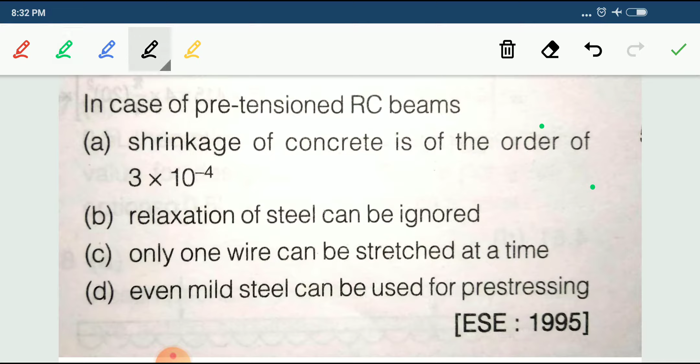Okay, the correct answer for this question is the shrinkage as per IS 1343. The shrinkage of concrete is 3 into 10 raised to minus 4. Due to shrinkage of concrete, pre-stressing members results in shortening of tensile wires that will contribute to the loss in pre-tension members. This is the answer for this one.

Okay, relaxation, this will not come. Only one wire can be stretched at a time - no. Even mild steel - no, we cannot use mild steel in pre-stressing. What is the reason for that? What is the strength of mild steel? That is only 250 Newton per mm square.

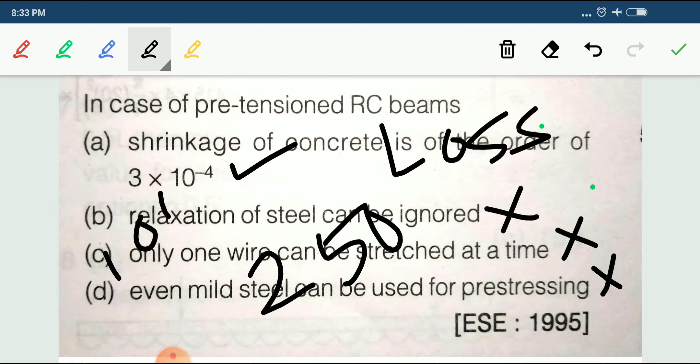Usually, if you go for the loss, what is the loss that is happening in the pre-stress? Nearly in the range of 100 to 250. This much of loss that will happen. That's why it is not advisable to use mild steel in pre-stress concrete. We are supposed to use high strength steel.

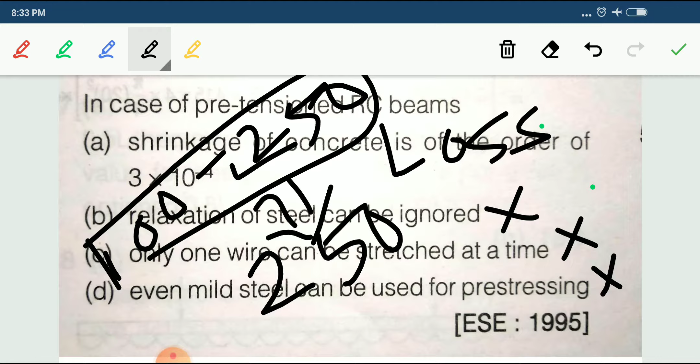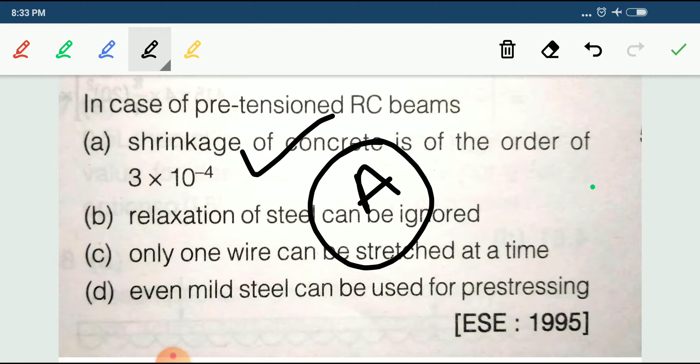For this one, which is the correct answer? Correct answer is A. A is the correct answer for this question. In case of pre-tensioned RC beams, the shrinkage of concrete is of the order 3 into 10 raised to minus 4. We will move to the next question.

Here what is it telling - in load balanced pre-stress concrete beam, under self load the cross section is subjected to? First you should know what is meant by the load balancing concept. The load balancing concept means based on bending moment diagram, we will provide the cable profile in the pre-stress concrete beam. Say if the loading is UDL.

If the loading is UDL, how the bending moment will be - it is parabolic. So same thing in case of pre-stress member also, we are going to provide the profile of the cable - it will be parabolic only. If it is a central point load, then the bending moment diagram is like that, then we will provide the triangular profile in the shape of BMD only. That is called the load balancing concept.

So for this question, what is telling - in a load balanced pre-stress concrete beam, under self load, the cross section is subjected to axial stress, bending stress, axial and shear stress, or axial and bending stress. Which is the correct answer? The correct answer for this question is only axial stress. Only axial stress, I will tell you.

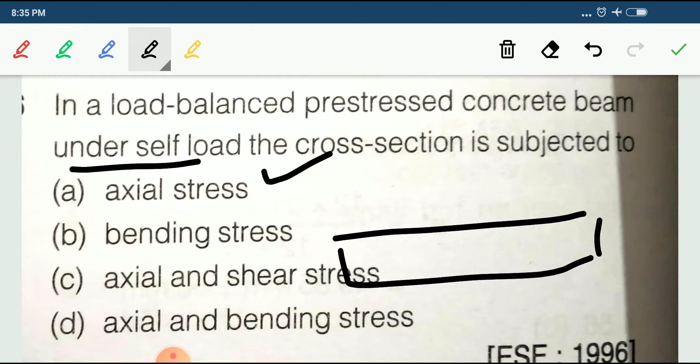Okay, usually what is under self load telling? Under self load, the bending moment that is coming is balanced by the cable profile itself. Remember what I am telling. Due to self load, only axial stress will be developed in the member. What you will observe? Only axial stress you can observe.

Okay, for this question, what is the correct answer? A is the correct answer for this question. We'll move for the next one.

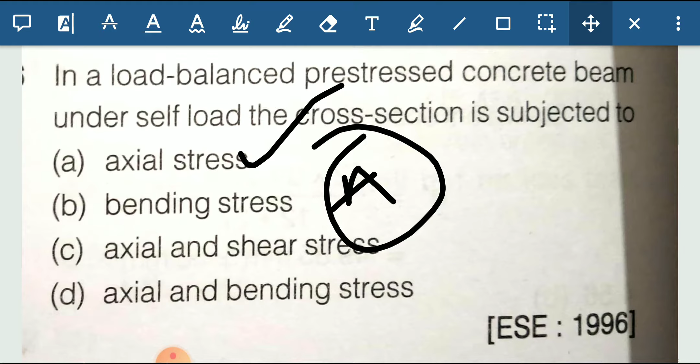Next, for pre-stressed structural elements, high strength concrete is used primarily because... Why we are going to use high strength concrete in pre-stress members? Because the stress that is to be induced by using hydraulic jacks to the tendons is very high.

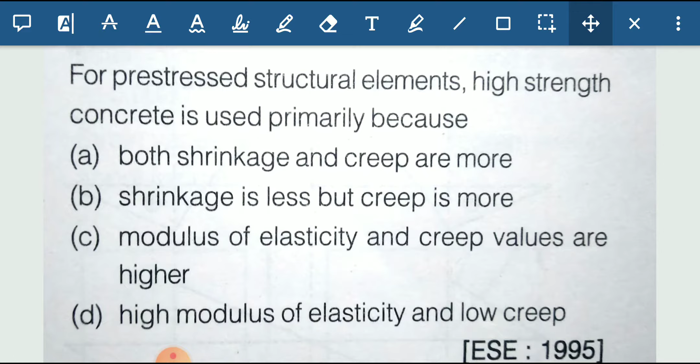It is in the order of up to 1500 Newton per mm square - this much of stress is induced at the end. In order to take this much load, this much stress will be transferred into the concrete, so we are using high strength concrete. So what is this question asking? For pre-stress structural elements, high strength concrete is used primarily because both shrinkage and creep are more.

Next, shrinkage is less but creep is more. No, modulus of elasticity and creep values are higher. No, high modulus of elasticity and low creep. Okay, this is the correct answer for this one. Which is the correct answer? High modulus of elasticity and low creep. Because if you use high strength concrete, it is less liable to shrinkage cracks, and has higher modulus of elasticity and less ultimate creep. Also, if you are using high strength concrete with a slender section, the cross section of the beam also reduces, and loss of pre-stress is also very less.

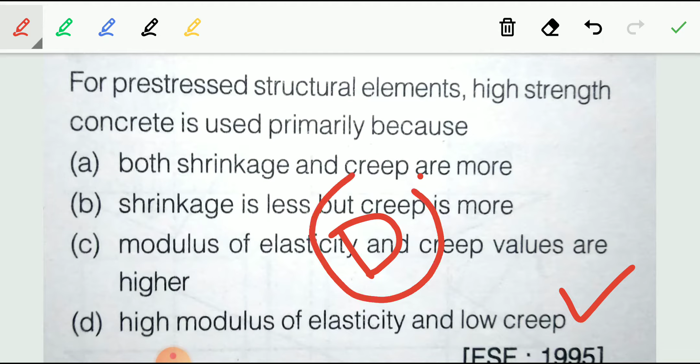So for this one, which is the correct answer? It has a high modulus of elasticity and low creep. D is the correct answer for this question. Okay, we'll move for the next question.

Next, a partially pre-stressed member is one in which tensile stresses and cracking are permitted under service loads. No tensile stresses are permitted under service loads. Mild steel is used in addition to pre-stressing steel. Tensile stresses are permitted, but not cracking at service load.

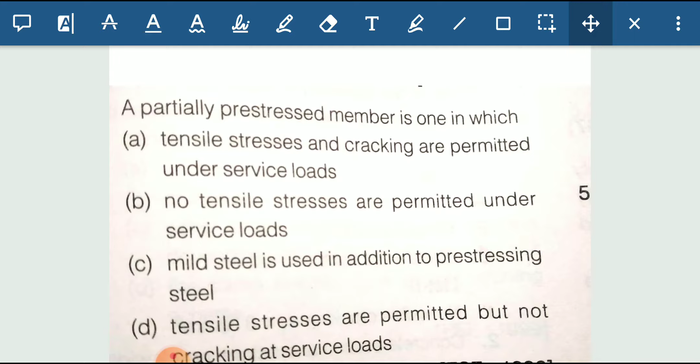Okay, first you should know what is meant by partial pre-stressing. In a partial pre-stress member, limited tensile stresses are permitted in concrete under service load with control on maximum width of crack. This is the one thing you have to remember.

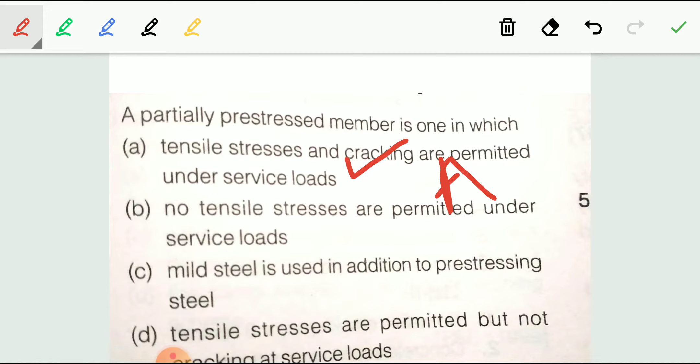So which is the correct answer for this question? A partial pre-stress member is the one which permits tensile stresses and cracking under service load, with control on the cracking under service load. Which is the correct answer for this question? A is the correct answer. Okay, we'll move for the next question.

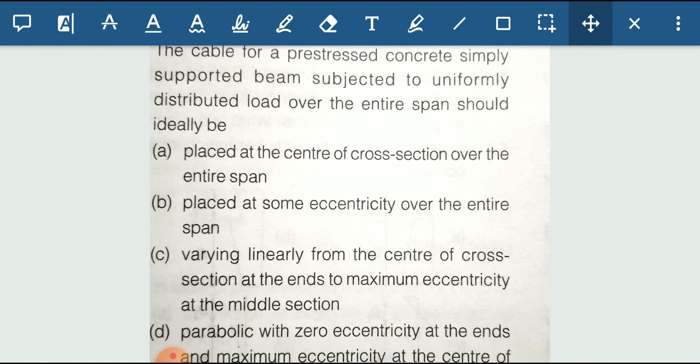In the cable for a pre-stressed concrete simply supported beam subjected to uniformly distributed load over the entire span, it should ideally be: placed at the center of cross section over the entire span; placed at some eccentricity over the entire span; varying linearly from the center of cross section to the end with maximum eccentricity at the middle section; or parabolic with zero eccentricity at the end and maximum eccentricity at the center of span. Okay, already you should know this.

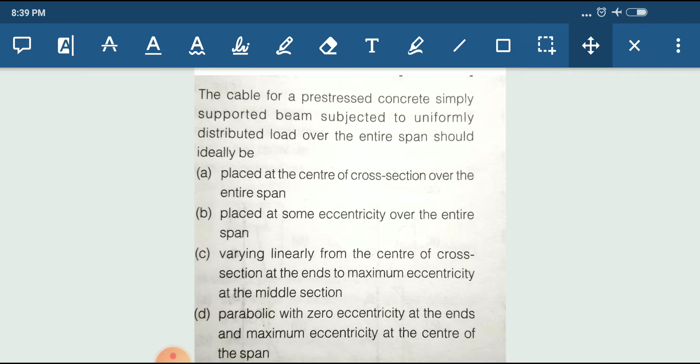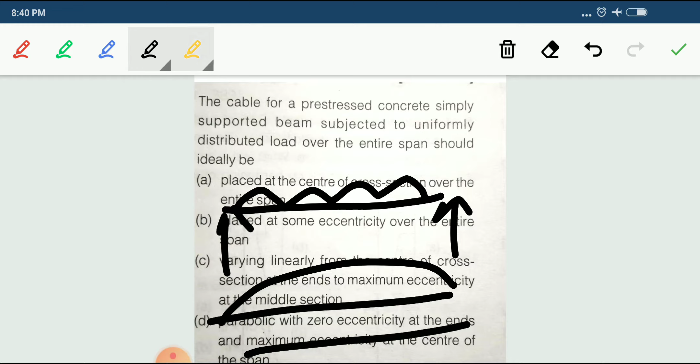So the cable for a pre-stressed concrete simply supported beam subjected to uniformly distributed load - say this is the beam, simply supported with UDL. How will the BMD look? It will be like that. And how will we provide the parabolic cable? Definitely the cable will be provided like that. How does it come? Say if it is the RC beam, if it is like that, what is the condition now?

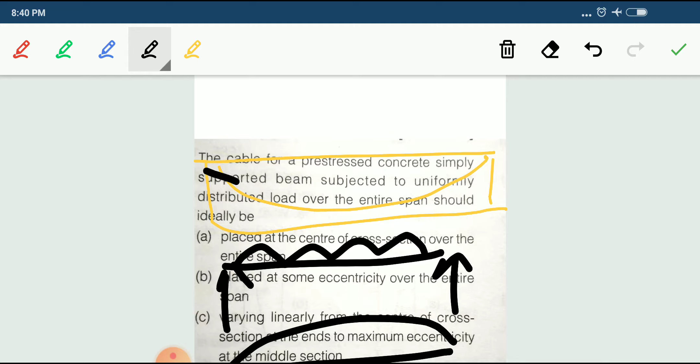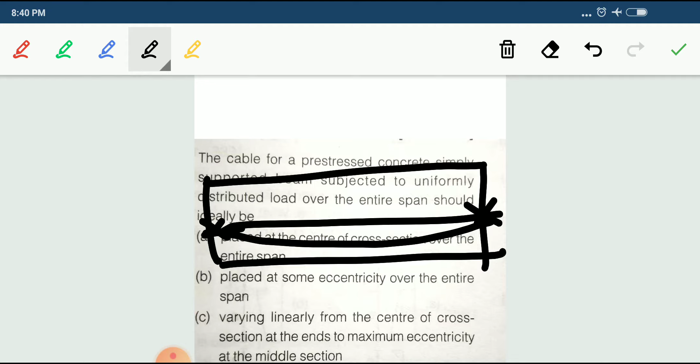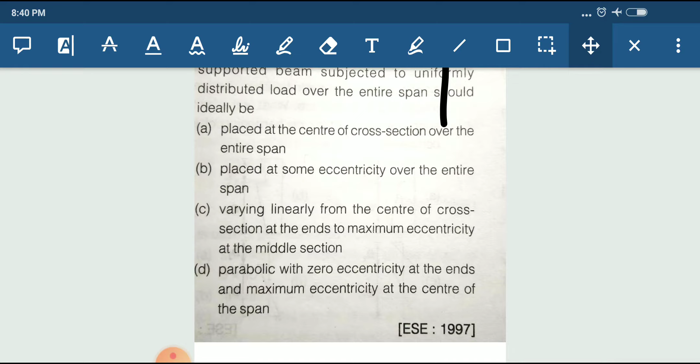Means zero eccentricity at the end - how will the cable profile be provided? Say this is the beam, so this is the way we'll provide it, meaning zero eccentricity at the end, varying linearly from the center of the cross section at the end to maximum eccentricity at the midsection. So which is the correct answer for this question? The answer will be parabolic with zero eccentricity at the end and maximum eccentricity at the mid span.

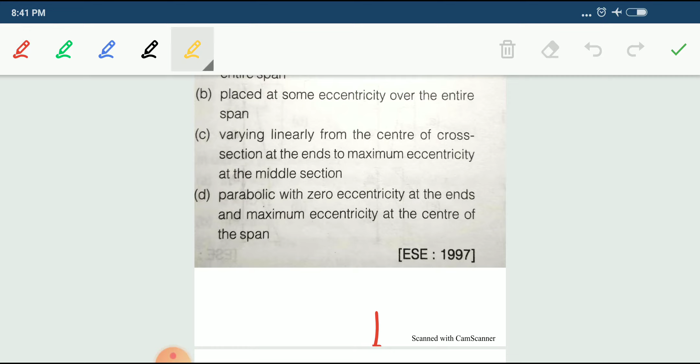So for this question, which is the correct answer? That is D. D is the correct answer for this question. Okay, we'll move for the next one.

For a pre-stressed concrete bridge beam, a minimum clear spacing of the cable or group of cables should be - he is asking what is the minimum clear spacing between the cables or group of cables. How much should it be? Should it be 25 mm, or 25 mm or 6 mm plus the largest size of the aggregate, or 40 mm, or 50 mm? This is the correct answer.

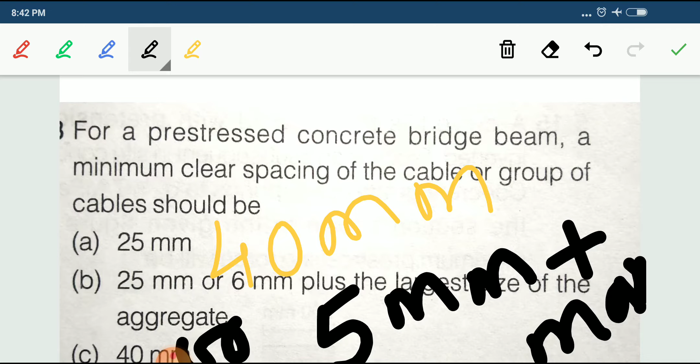Okay, usually for the cable the minimum spacing should be 40 mm, meaning 40 mm or 5 mm plus maximum size of aggregate. So for this question, which option is the correct answer? The answer is 40 mm is correct. How much minimum spacing should be provided between the cables? That is 40 mm. Okay, we'll move for the next question.

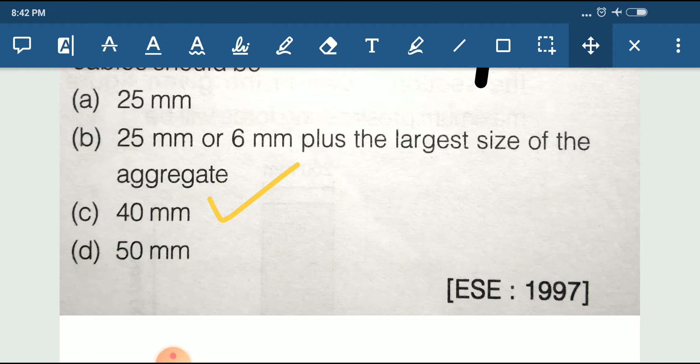If a simply supported concrete beam pre-stressed with a force of 2500 kilonewton is designed by a load balancing concept for an effective span of 10 meter and to carry a total load of 40 kilonewton per meter, find the central dip of the cable profile.

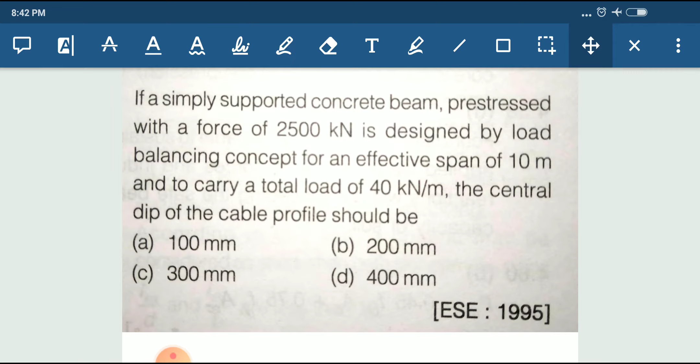He is asking the central dip. For this one you should know the formula. First you will write the given data. What other thing is given? He is given the pre-stressing force.

How much pre-stressing force? This is P, the pre-stressing force. Next what is given? The length, the span, and next the load.

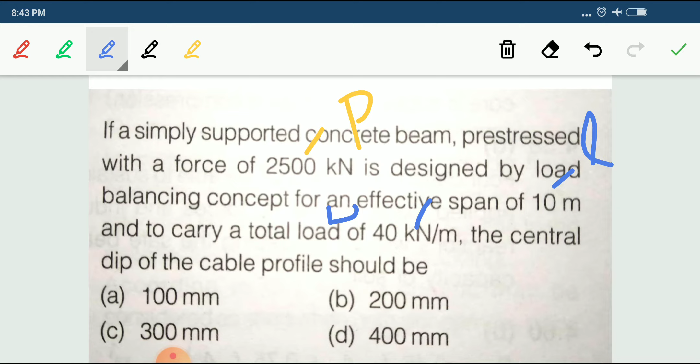So what is the formula? If you want to calculate the central dip, the formula is H is equal to W L square divided by 8P.

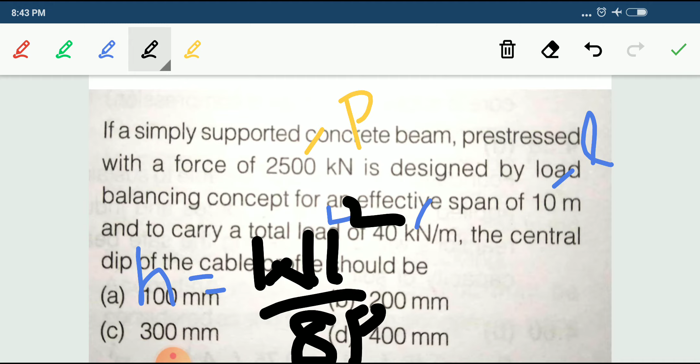W L square by 8P. What is W? W is 40 into, what is span? Span is 10.

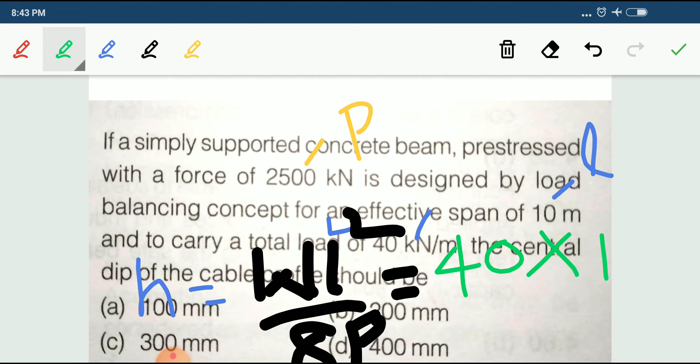What is the formula? Formula is H is equal to W L square by 8P. From this W is how much?

That is 40 into L square, that is 10 square, divided by 8 into P here. Into what is pre-stress? How much is pre-stressing force? That is 2500.

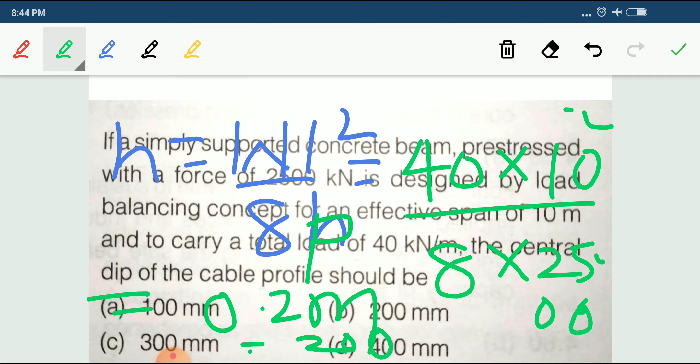If you solve, what is the answer you are getting? You are getting 0.2 meter. 0.2 meter means, if you convert it to mm, that is 200 mm is the answer.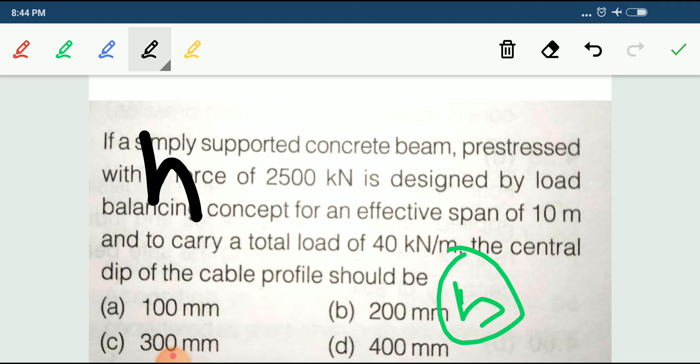What is the correct answer? B is the correct answer. For this one you have to remember the formula: H is equal to W L square divided by 8P, where W is the load, L is the span, and P is the pre-stressing force. This is the central dip formula.

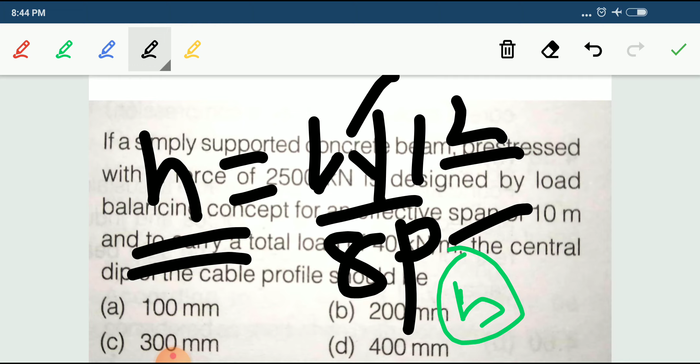The answer is 200 mm. Next, the magnitude of loss of pre-stress due to relaxation of steel is in the range of, this will be the answer for this question.

Is it 0 to 1%, 2 to 8%, 8 to 12%, or 12 to 14%? The magnitude of loss of pre-stress due to relaxation is in the range of 2 to 8%. Option B is the correct answer for this question.

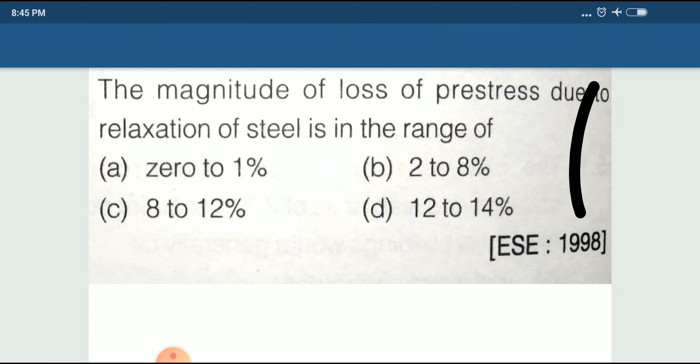We'll move to the next one. In pre-tensioning scheme, is pre-stress load transferred in a single stage process, multi-stage process, either single stage or multi-stage depending upon the magnitude of load transfer, or in the same manner as the post-tension scheme?

So here you should know the basics. You should already know what is meant by pre-tension and post-tension. If you know this, you can easily answer this question. Usually in the pre-tension system, the tendons are first tensioned between the rigid anchor blocks.

The rigid anchor blocks, prior to the concrete casting. Getting your point? The pre-tensioned wires are released either by cutting.

What will we do? Either by cutting or by releasing the jack pressure. The high tensile wire tends to shorten, but is checked by the bond between the concrete and steel. Getting what I am telling?

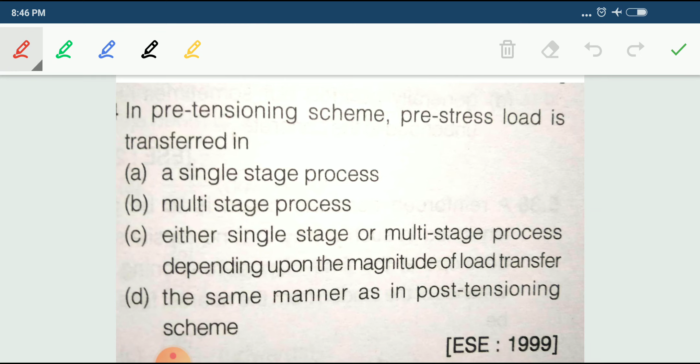So for this one, which is the correct answer? The answer is that in the pre-tension scheme, the pre-stress load is transferred at a single stage process only. It is transferred at a single stage process. The answer for this one is A, which is the correct answer.

Next, in the conventional pre-stressing, the diagonal tension in concrete — does it increase, decrease, does not change, or may increase or decrease? Which is the correct answer?

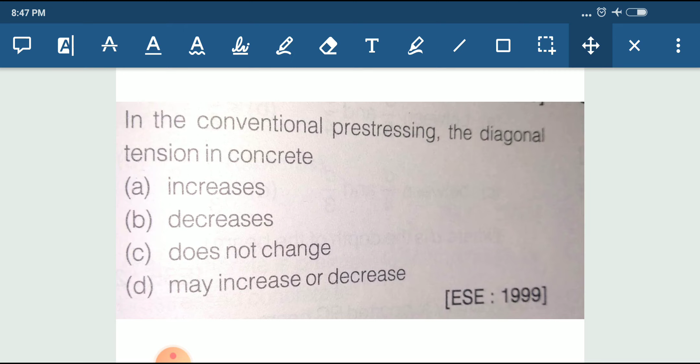Definitely, the diagonal tension in concrete will decrease. Which is the correct answer? B is the correct answer for this question.

I think we will discuss the next objectives in the next lecture. Thank you, one and all.